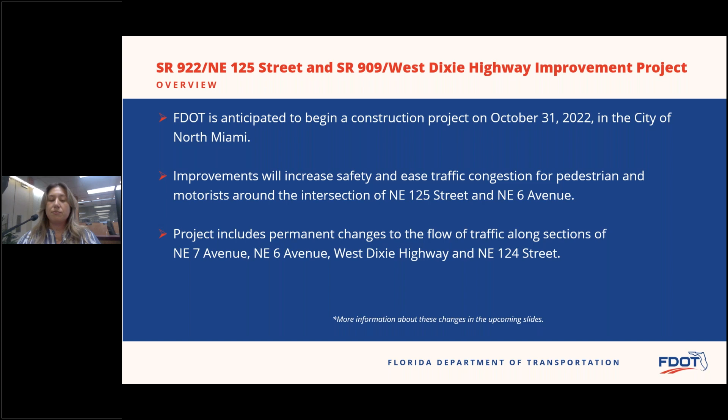The project schedule is scheduled to begin in late October through late summer of 2023. The contract has an estimated project cost of $4.2 million. The project is fully funded. There is also a 20-day early completion bonus for the contractor.

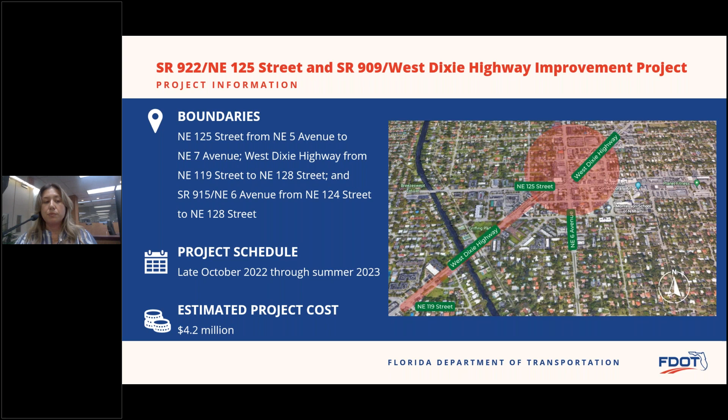I'm going to introduce John Garcia, our construction project manager. He's going to start reviewing the existing conditions and then go through the project scope of work.

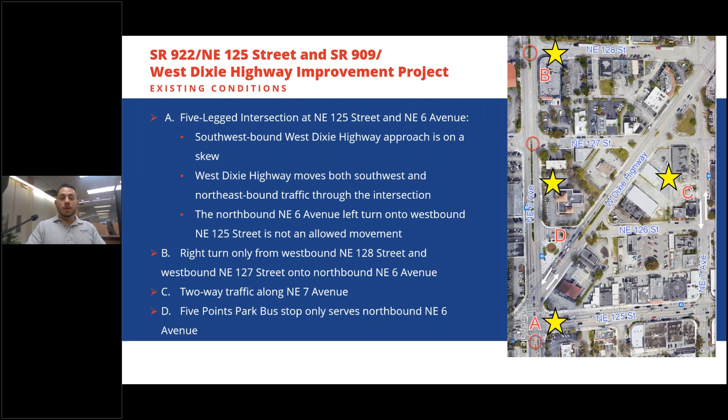We have two-way traffic along Northeast 7th Avenue, as you see at section C. And you'll note the 5 Points Park bus stop only serves northbound Northeast 6th Avenue there on item D. So some of the highlights that we're going to be improving and changing are noted here.

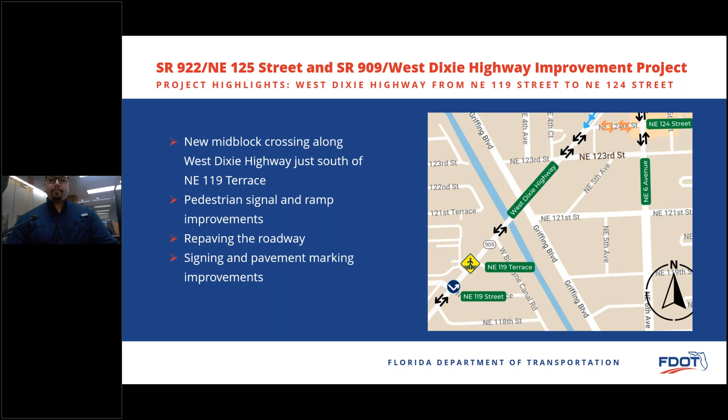Thank you, John. So I want to walk you through real quick and show you some things that we might be expecting and how we're going to be mitigating during the construction process.

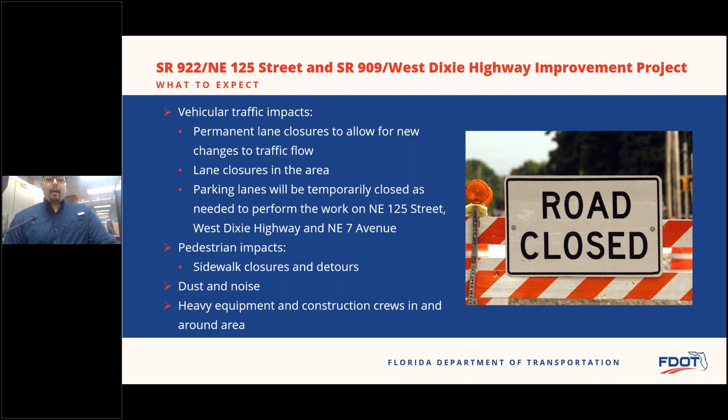We should expect vehicular traffic impacts and permanent lane closures that will allow for the new changes to the traffic flow. There will be some lane closures in the area. Some parking lanes will be temporarily closed as needed to perform the work on Northeast 125th Street, West Dixie Highway, and Northeast 7th Avenue. For pedestrians, impacts will mostly be sidewalk closures and detours. There will be some dust and noise, and heavy equipment and construction crews in and around the area.

For Northeast 125th Street, lane closures may take place between 9 a.m. to 3:30 p.m. weekdays and weekends, 9 p.m. to 5:30 a.m. Sunday through Thursday nights, and 11 p.m. to 7 a.m. Friday and Saturday nights.

On West Dixie Highway, lane closures may take place between 9 a.m. to 3:30 p.m. weekdays and weekends, and between 8 p.m. to 7 a.m. weeknights and weekends.

Looking a little bit in detail at the lane closures and detours on West Dixie Highway between Northeast 125th Street and 127th Street, this detour will close all lanes along West Dixie Highway. Traffic will be redirected through Northeast 6th Avenue and turn on Northeast 127th to travel around the work. This will allow contractors to pave the roadway and construct the pedestrian ramps. This detour is anticipated to begin around spring 2023, and should be short-term duration.

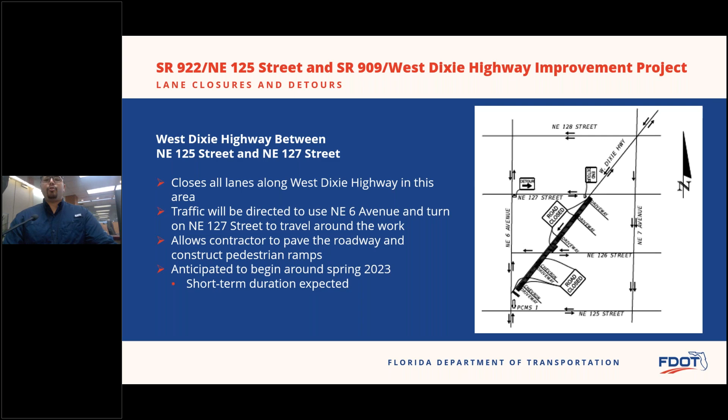Another lane closure will be on West Dixie Highway at Northeast 123rd Street. This closure will close the right turn lane from Northeast 123rd Street onto West Dixie Highway. Traffic will be redirected to travel around Griffing Park to continue onto West Dixie Highway. Other lanes will remain open.

This will allow the contractor to rebuild the right turn lane. The anticipated schedule is not yet determined, but it should also be short-term duration.

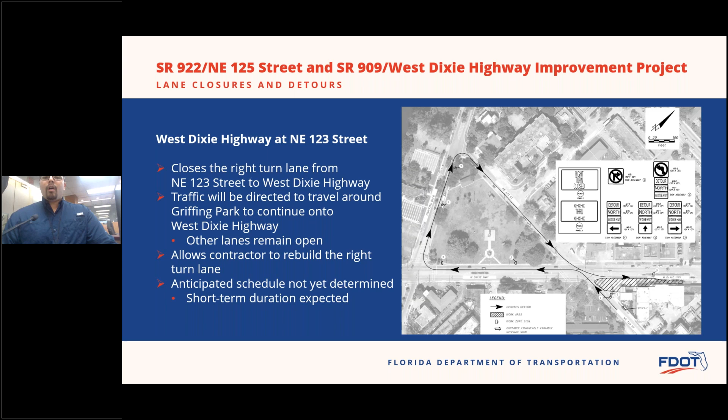Some of the mitigation efforts we'll be implementing: we will be opening permanent work zones as quickly as possible. We will coordinate with businesses to minimize impacts. There will be clearly signed roadway and pedestrian detours highlighting alternate routes, and we will do frequent watering and sweeping on the streets. Now to look at our outreach plan, let's go back to Heather.

Thank you, Carlos. I am serving as the community outreach specialist on the project. Myself and team members are available to meet with you at any time, whether we need to be meeting on-site at your business or property.

We're also going to be sending weekly email updates throughout construction. They will provide a look ahead at the work and the anticipated closures that we're expecting as part of the project. The information will also be included on the construction site, on the department's website.

On the website itself, you will be able to find project information and the lane closure information. There's also a function where you may submit any kind of questions or feedback, and that comes directly to the team members. So we really want to emphasize that this is a partnership that we want to build with the community throughout construction and maintain those open lines of communication.

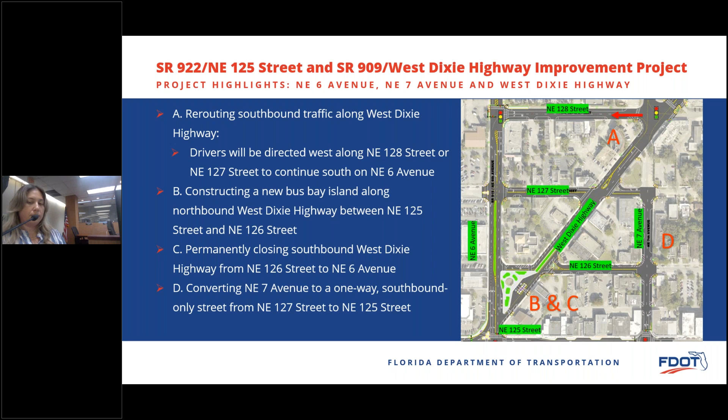I have a real quick question. You're going to take 124th Street between Northeast 6th Avenue and West Dixie Highway and turn it back into 2 lanes. Is this still going to be where if you're coming eastbound on 124th Street, you must make a right turn to head south, as opposed to a left turn to head north?

It's going to stop the movement of going straight through 124th or heading north along 6th Avenue. So with the median, you'll only be able to move south. Eastbound 124th will be right turn only. As part of our project, eastbound 124th Street will have to turn south onto Northeast 6th Avenue.

Thank you guys for clarifying. Thank you, sir. We also have Anne Marie online, I can't see all of that. Is that online? It is currently online, and yes. No problem, Anne Marie, did you want to say something?

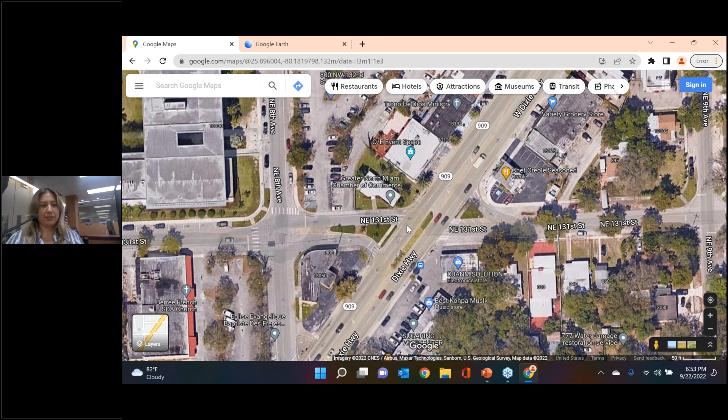So now you got this is 132nd cutting through. That's the North Miami Library. People are going to be cutting through there, turning on 8th and hauling butt in front of the high school.

Again, like some people mentioned, having the bumps for them to slow down. Also back here, this one too, this street and this street, this is all residents. You guys are causing people to cut through and they're not going to go the speed limit, they're not going to pay attention to it.

Okay, so then the recap on 133rd, 132nd, 131st, and behind it another one, 133rd. The concern of cut through traffic diverting from West Dixie through the neighborhood roads. So again, I think that would need further discussion with City of North Miami, as those streets are the local roads.

Okay, so if we close 131st, is it okay with you guys? It's not okay. It's not okay for me to make those decisions. I couldn't tell you, but that's definitely a discussion that we would have to continue with the city. Thank you, sir.

Do we have any additional questions that have come in? No questions from the chat.